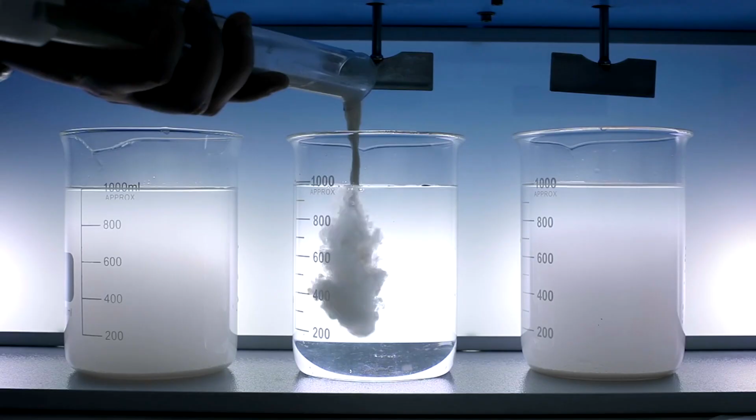You turn on the tap and clean water flows out. Clear, tasteless, safe to drink. For most people, this feels completely normal. Yet drinking water is not a natural product. It is the result of one of the most strictly controlled and technologically demanding processes modern society operates every single day. If this system stopped working, cities would begin to fail within hours. The first thing to understand is simple and uncomfortable: natural water is not drinking water. Rivers, lakes, reservoirs, and even groundwater contain bacteria, viruses, parasites, heavy metals, nitrates, pesticides, and microscopic contaminants that cannot be seen with the naked eye. Water can look perfectly clean and still be dangerous.

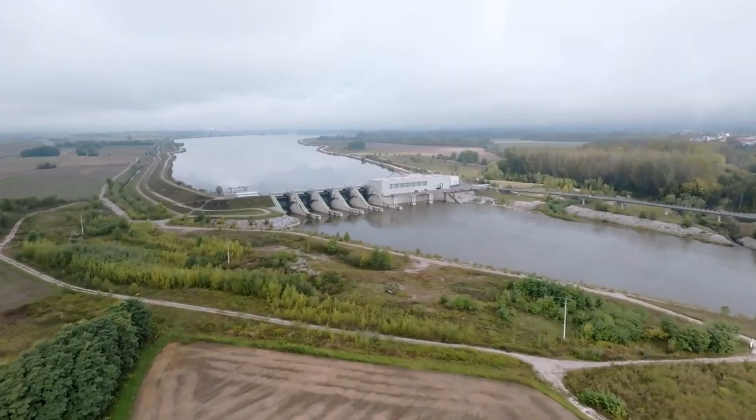Appearance means nothing. Drinking water production does not start in your kitchen, and it does not start with a household filter. It starts with the selection of a water source. This decision determines how complex the entire treatment process will be and how stable the water quality can remain over time. Surface water and groundwater behave very differently, carry different risks, and require different treatment strategies.

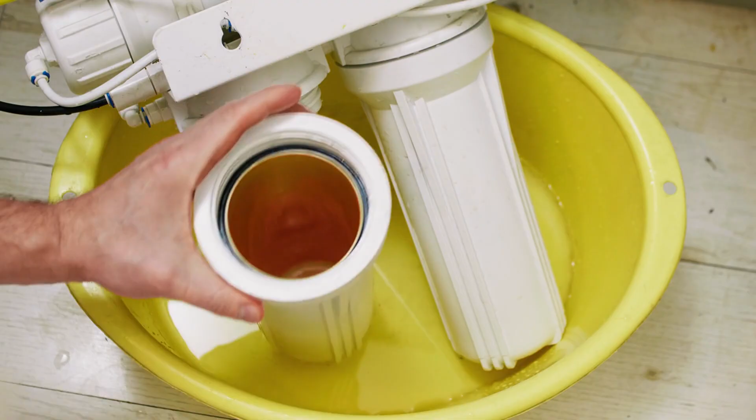Here comes a crucial paradox. The goal is not to make water sterile. Sterile water would be chemically aggressive, unstable, and damaging to pipes and infrastructure. The goal is microbiologically safe water that meets strict health limits, tastes natural, and remains stable inside the distribution network for hours or even days.

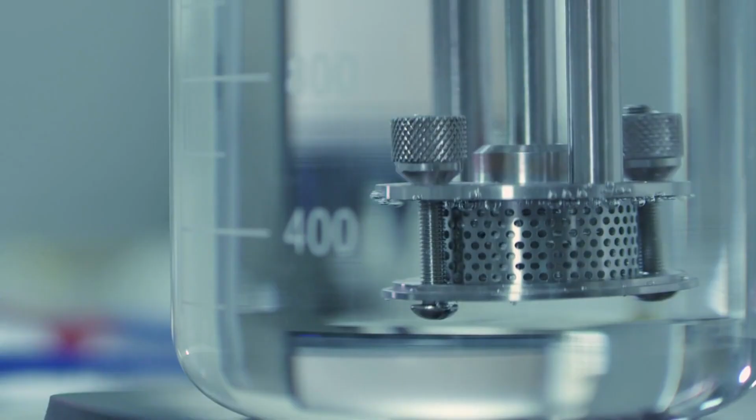Every part of this process is continuously monitored. Chemical composition, microbial content, turbidity, pH, and disinfectant levels are checked around the clock. Drinking water is one of the most controlled products humanity produces. And yet, most people never think about it until something goes wrong.

In this video, we will break down how drinking water is produced without simplifications and without repetition. From water sources and early treatment stages to advanced purification, disinfection, and distribution. Because once you understand what it takes to turn raw natural water into safe drinking water, you will never look at a simple glass of water the same way again.

Every drop of drinking water begins its journey in the natural environment, and the type of water source determines almost everything that follows. There is no universal solution. What works for one region may be inefficient, risky, or economically impossible for another. That is why water treatment always starts with understanding the source itself.

Water sources are generally divided into surface water and groundwater. Surface water comes from rivers, lakes, and reservoirs. It is relatively easy to access but highly variable. Its quality changes with rainfall, snowmelt, agricultural runoff, industrial activity, and seasonal biological processes. After heavy rain, surface water can become cloudy, rich in organic matter, microorganisms, and contaminants washed in from large catchment areas. Because of this instability, surface water requires the most complex and multi-stage treatment.

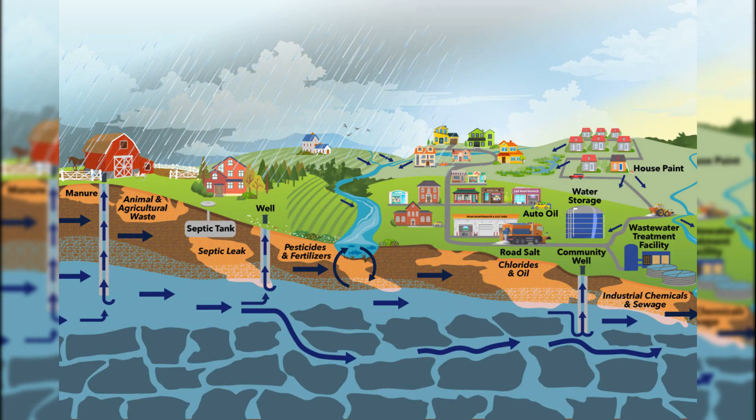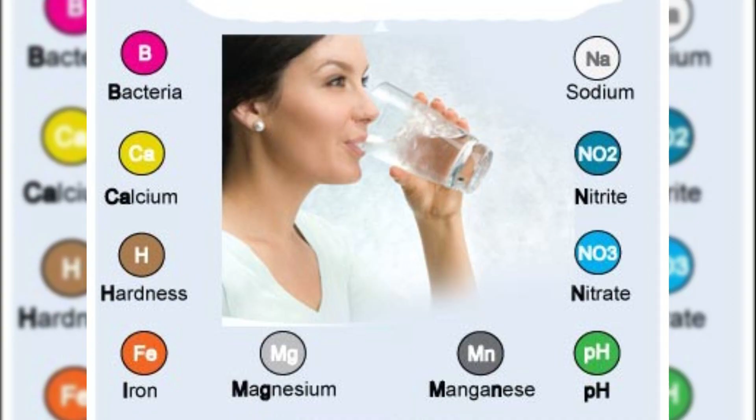Groundwater behaves very differently. As it slowly moves through soil and rock layers, it undergoes natural filtration. This often makes it clear and low in pathogens. However, clarity does not equal safety. Groundwater may contain dissolved iron, manganese, arsenic, nitrates, or have unsuitable pH and hardness. Treating groundwater usually focuses less on removing particles and more on chemical correction and stabilization.

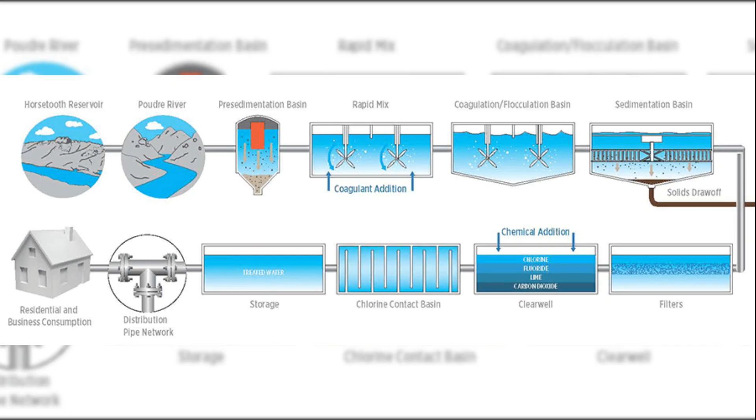Once a source is selected, water intake begins. Water is collected through intake structures, wells, or infiltration systems, and transported to a treatment plant. From this moment on, the water leaves the natural system and enters a fully controlled technological process. Monitoring starts immediately. Parameters such as temperature, turbidity, conductivity, and basic chemical indicators are continuously measured to detect sudden changes in quality.

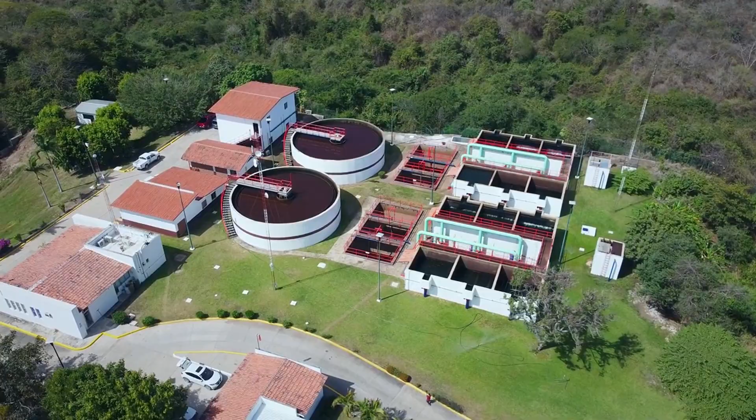The first goal of a treatment plant is not perfect purification. It is system protection and stabilization. Raw water first passes through screens, grates, or coarse filters that remove large debris such as branches, leaves, sand, plastics, and stones. This step may look simple, but it is essential. Without it, downstream equipment would suffer damage, blockages, or rapid wear.

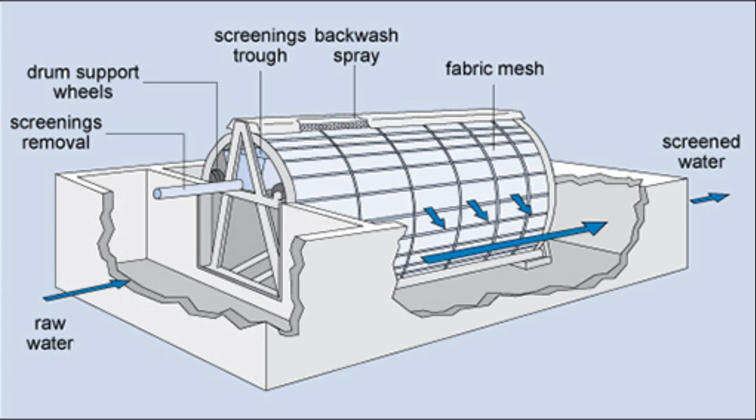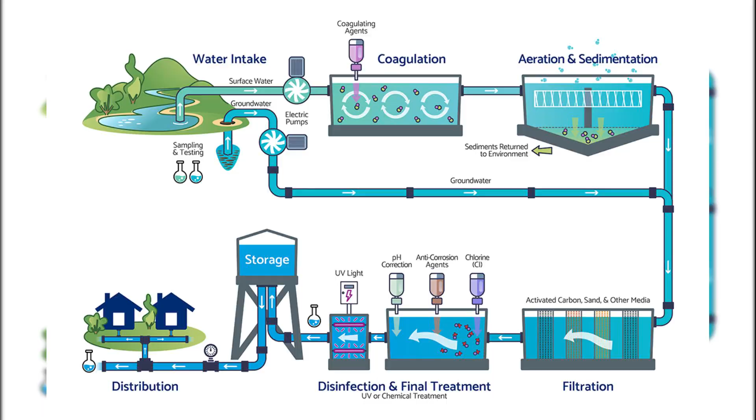After coarse removal, the water enters pre-treatment. For surface water, this often includes aeration or pre-oxidation. Aeration introduces oxygen, helping to release unwanted gases, reduce odors, and partially break down organic compounds. Pre-oxidation can also improve the efficiency of later chemical processes and reduce taste and odor problems before they become harder to remove.

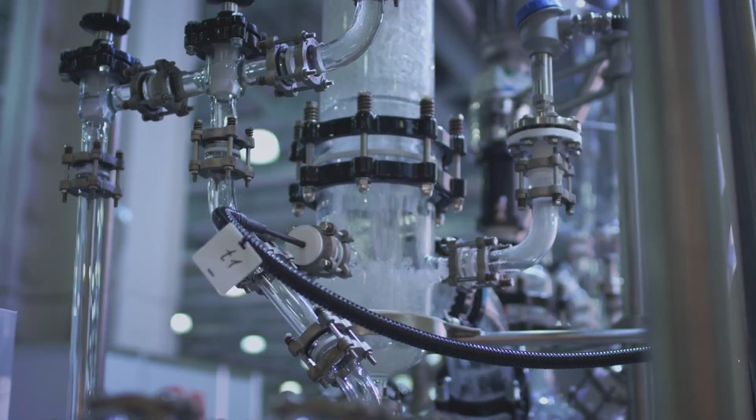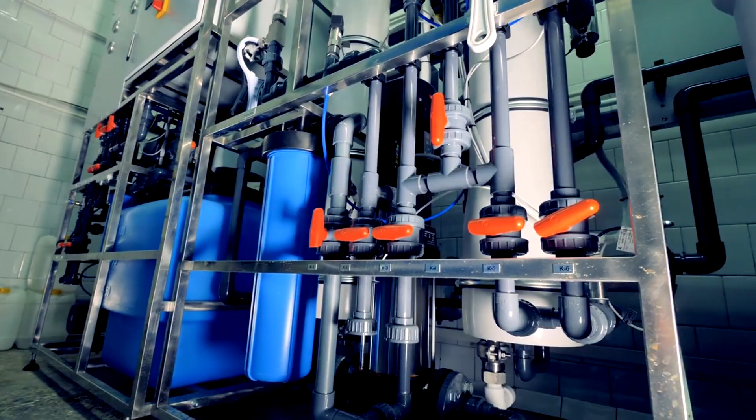Another critical function of this stage is flow and quality equalization. Treatment plants cannot operate effectively under sudden fluctuations. Raw water may be temporarily stored in balancing tanks or reservoirs where it mixes and stabilizes. This prevents sharp changes in turbidity or chemistry from disrupting the next stages of treatment. Even at this early point, the process is already highly controlled. Continuous measurements ensure that abnormal conditions are detected before they can affect the core purification steps. If something goes wrong later in the process, the consequences are far more serious and harder to correct.

This stage reveals an important truth. Drinking water production is not about a single powerful technology. It is about a chain of carefully coordinated steps, each preparing the water for the next. If the early stages fail, no advanced filtration or disinfection can fully compensate. Once raw water has been stabilized and pre-treated, the process reaches its most critical turning point.

This is where the majority of dangerous contaminants are actually removed, even though they are completely invisible to the human eye. And this is also where one of the most counterintuitive steps occurs: to clean water, chemicals must be deliberately added to it.

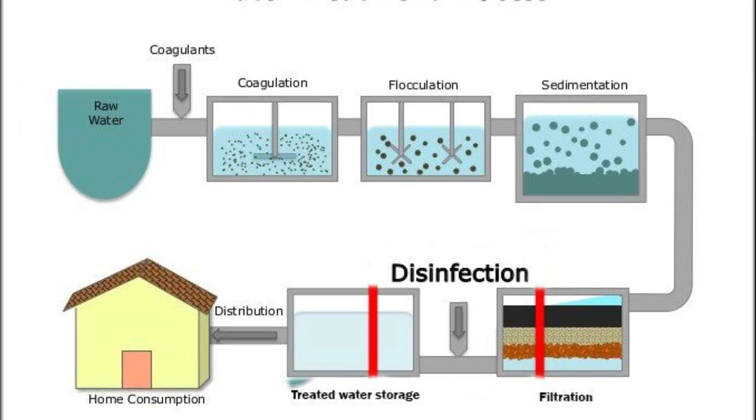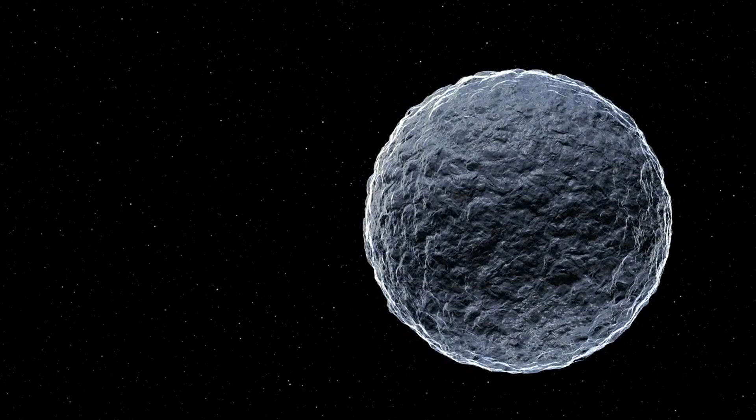Most impurities in water are not large particles that can simply settle or be trapped by a filter. They exist as microscopic colloids, bacteria, fragments of organic matter, and dissolved compounds. These particles are so small that gravity has almost no effect on them. They remain suspended because they carry electrical charges that cause them to repel one another.

The first step in breaking this stability is coagulation. A coagulant, typically based on aluminum or iron salts, is carefully dosed into the water. Its role is to neutralize the electrical charges on suspended particles. Once these charges are disrupted, the particles lose their ability to repel each other. This moment is crucial—without it, no further physical removal would be possible.

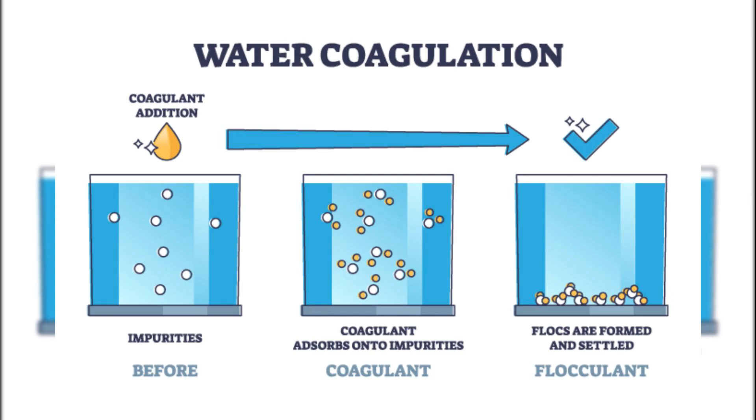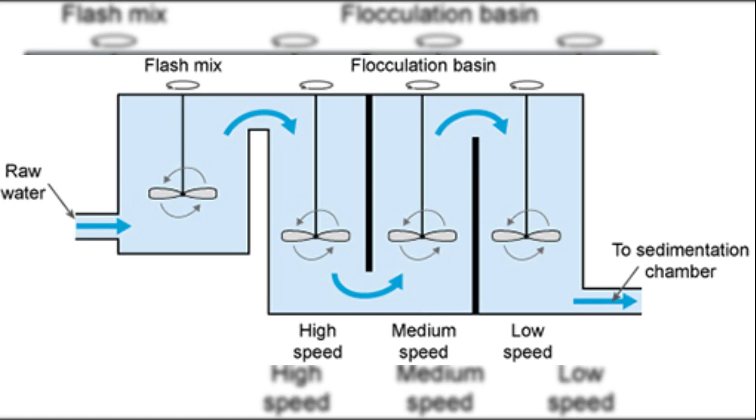Immediately after coagulation comes flocculation. The water is gently mixed at controlled speeds, allowing destabilized particles to collide and stick together. Over time, they form larger structures called flocs. These flocs are no longer microscopic—they are heavy and visible enough to be physically separated from the water. The mixing must be precise. Too strong and the flocs break apart. Too weak and they never form properly.

Once flocs are formed, they must be removed. This is done through sedimentation or flotation. During sedimentation, flocs sink to the bottom of large basins under their own weight. During flotation, tiny air bubbles attach to the flocs and lift them to the surface, where they are skimmed off. The choice between these methods depends on water temperature, density, and the nature of the contaminants. The goal is always the same: remove as much unwanted material as possible before filtration.

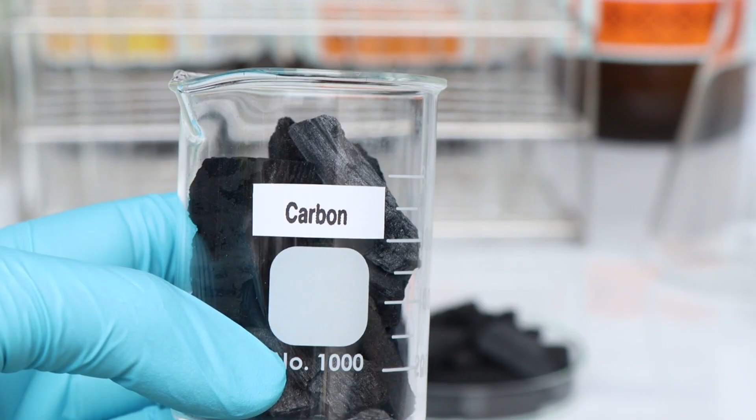After this separation, the water enters filtration, which many people mistakenly believe is the main cleaning step. In reality, filtration works effectively only because coagulation and flocculation have already done the hard work. Treatment plants use multi-layer filters made of sand, anthracite, or granular activated carbon. Water flows slowly through these layers, allowing remaining fine particles to be captured deep within the filter bed.

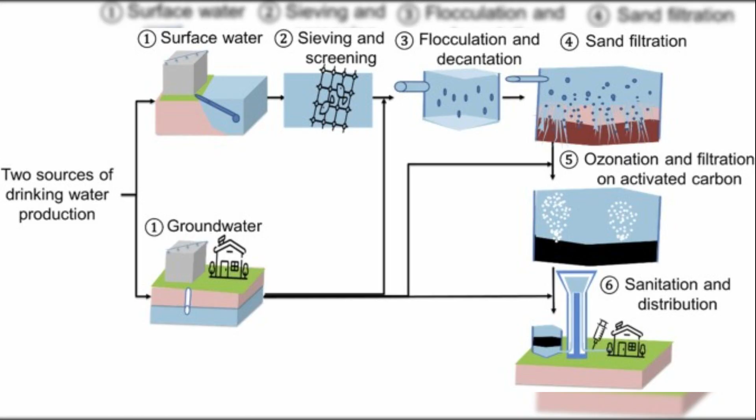Activated carbon plays a special role. It adsorbs organic compounds, pesticides, pharmaceutical residues, and substances responsible for taste and odor. By the end of filtration, the water appears perfectly clean, clear, colorless, and visually pure. Yet despite its appearance, the water is still not safe to drink. Microorganisms such as bacteria and viruses may still be present. Filtration removes particles, not biological threats.

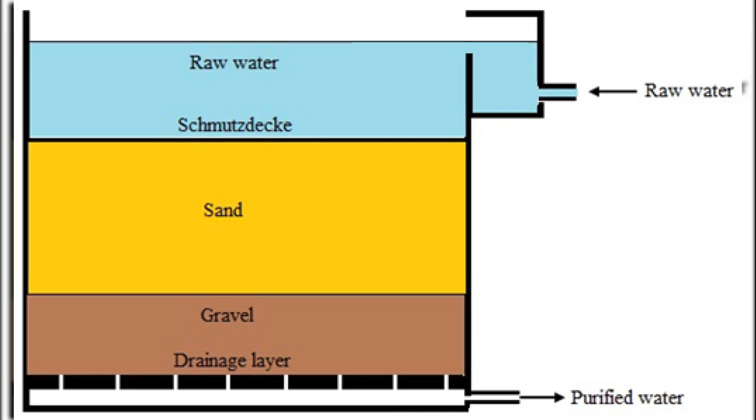This stage prepares the water for the final and most sensitive process. Without proper filtration, that final step would be unreliable and ineffective. This part of the process shows how tightly chemistry and physics are intertwined. Every dose, every mixing speed, and every contact time matters. There is no room for guesswork. Drinking water quality is the result of hundreds of precisely controlled decisions, all of which must work together.

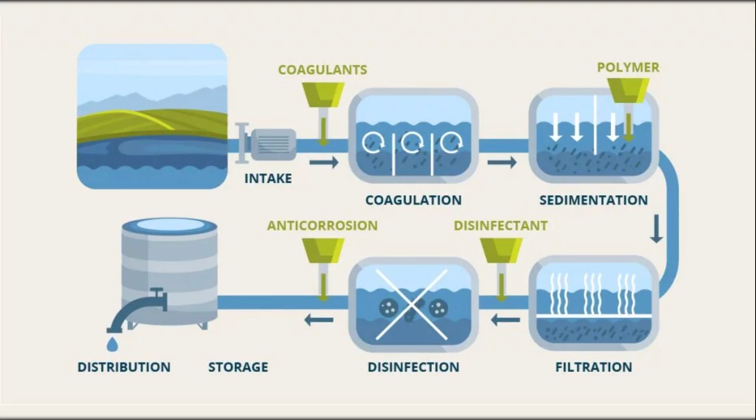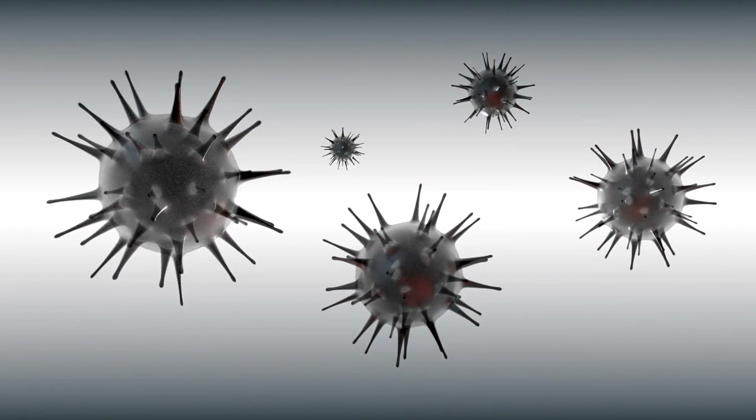After coagulation, flocculation, and filtration, the water looks perfect. It is clear, odorless, and free of visible impurities. Yet at this stage, it is still not fully safe to drink. Harmful bacteria, viruses, and microorganisms may remain. The final and most sensitive stage of drinking water production is therefore disinfection.

The purpose of disinfection is not sterilization. Sterile water would be chemically unstable and aggressive toward pipes, valves, and household plumbing. Instead, the goal is microbiological safety—eliminating pathogens while maintaining chemical balance and long-term stability.

The most widely used method is chlorination or chloramination. Chlorine is effective, fast, and crucially leaves behind a small residual concentration. This residual disinfectant continues to protect the water as it travels through kilometers of distribution pipes. Without this protective effect, water could become contaminated again long before it reaches consumers.

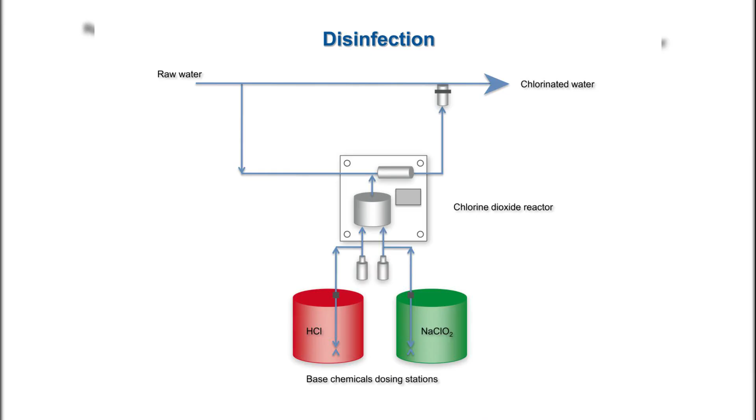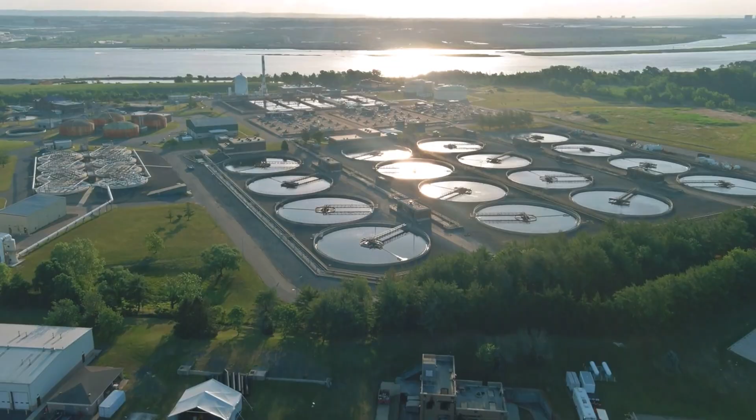Some systems also use ozone or ultraviolet radiation. Ozone is a powerful oxidant that destroys microorganisms and organic compounds, while UV light effectively inactivates bacteria and viruses without adding chemicals. However, neither ozone nor UV provides lasting protection in the distribution network. For this reason, they are often combined with low-level chlorination to ensure safety beyond the treatment plant.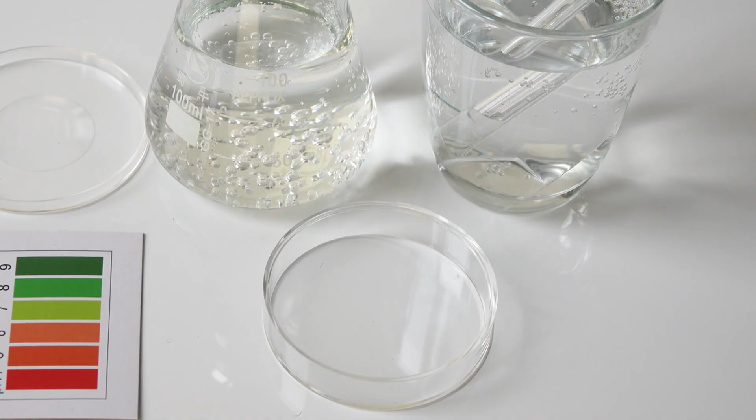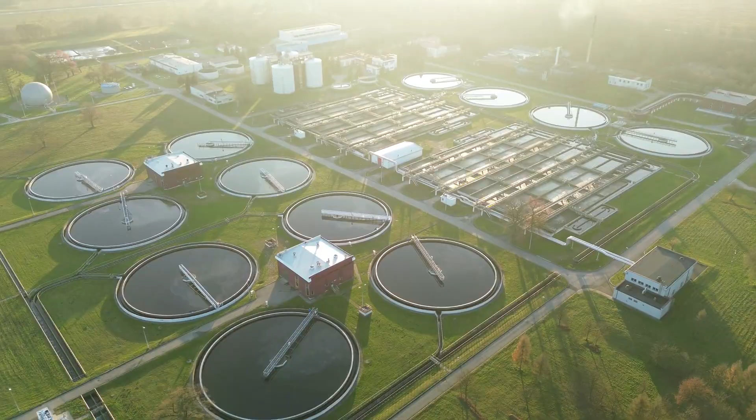After disinfection comes water stabilization. Parameters such as pH, hardness, and mineral content are adjusted. Water must not be too acidic or too soft. Aggressive water can corrode pipes and leach metals into the supply. Overly hard water causes scaling and operational problems. Stabilization ensures that water remains compatible with infrastructure and pleasant for everyday use.

Only after this adjustment does drinking water enter the distribution system. But control does not end there. Water quality is continuously monitored throughout the network. Samples are taken at multiple locations to check disinfectant levels, chemical composition, and microbiological safety. The system operates continuously, day and night, without interruption.

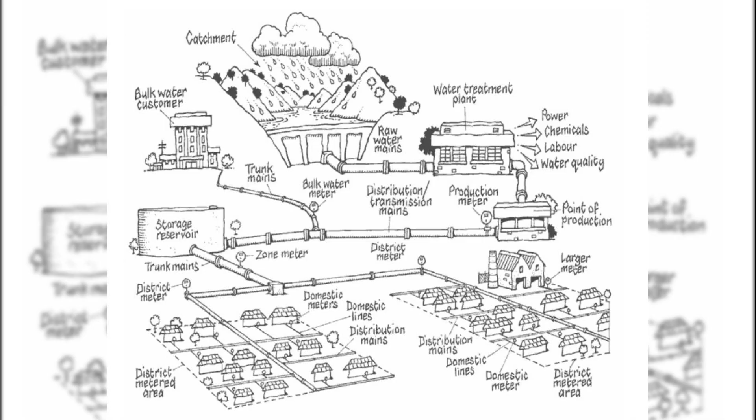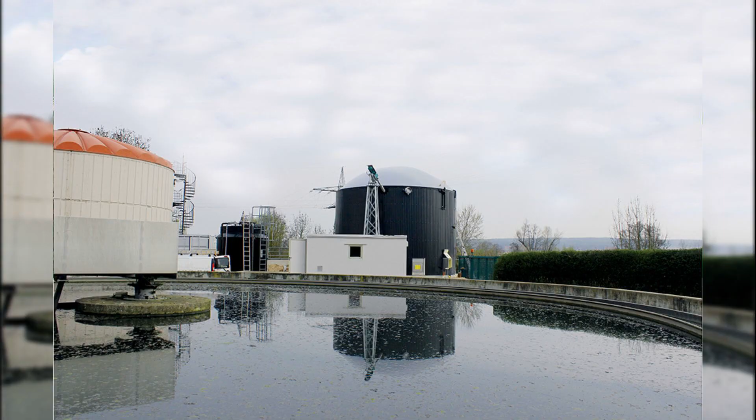One of the greatest paradoxes of drinking water is that it must remain alive. It must contain minerals, maintain balance, and remain chemically stable. Water that is too pure becomes aggressive. Water that is too natural becomes dangerous. Drinking water is therefore a precise compromise between safety, stability, and usability.

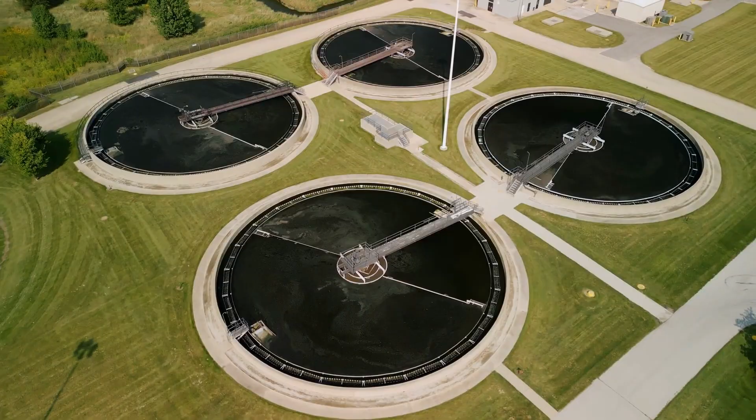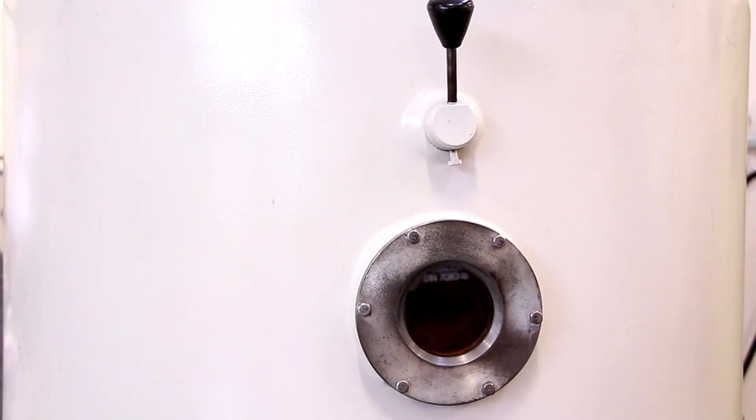The entire process operates silently in the background of modern life. We rarely notice it, yet it is one of the most critical systems supporting civilization. Without it, cities could not function, health systems would collapse, and daily life would come to a halt. Tap water is not a gift of nature—it is the result of advanced technology, physics, chemistry, and biology working together every single day. And that is why a simple glass of drinking water is one of the most remarkable achievements of modern society.